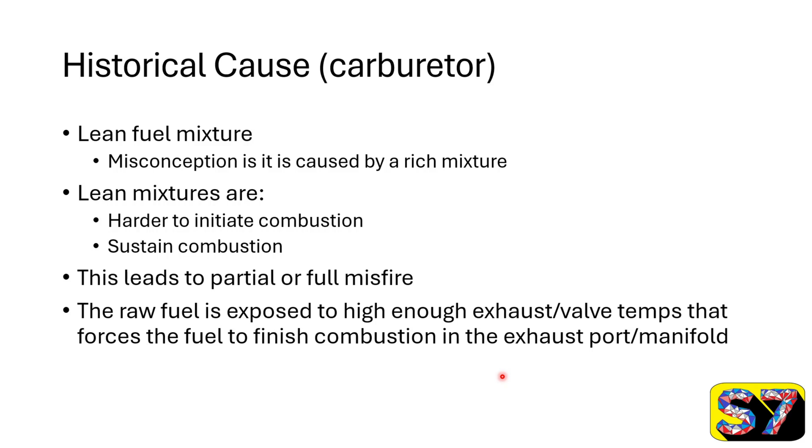So basically, raw fuel never gets combusted inside the cylinder, and it pops on its way out from either the hot exhaust valve, the exhaust runner itself, or somewhere inside the manifold, where the fact that it's lean doesn't matter because it's just overwhelmed by this exceedingly high temperature. It just pops. And that's typically what happens on a carburetor.

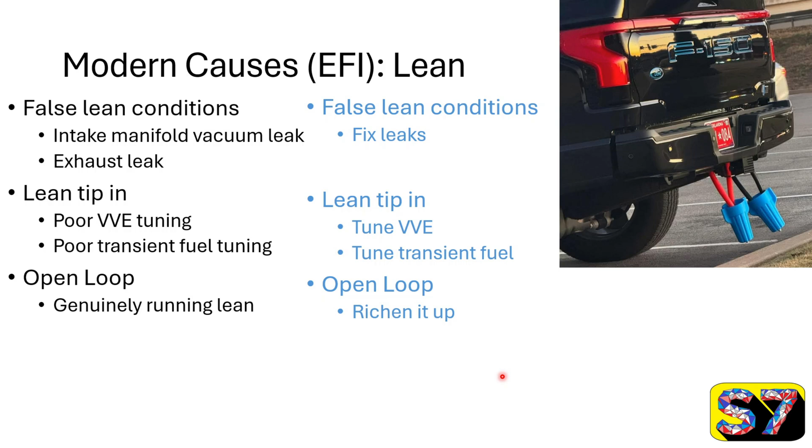It's lean. So for EFI, which applies to us, there are going to be some other issues at play. Yes, lean mixtures can still be a problem, typically more in your open loop scenario, because once you're in closed loop, it's going to want to keep it at that stoichiometric ratio. But vacuum leaks, exhaust leaks, and also on tip-in, transient fueling - if your virtual VE isn't dialed in or your transients aren't dialed in, that can cause it. So obviously the fixes here are to fix your leaks, tune your stuff, and richen it in open loop as needed.

Another issue that can cause popping - and this is just general popping, not necessarily on decel, but to cover all our bases - is fuel injector issues. LSA injectors spray at an angle bespoke to the LSA intake design, but you may have a poor spray pattern due to clogged injectors. Maybe they're propane injectors, maybe your fuel pressure is low, or just your fuel injector is wrong. But you can also have popping caused by other transient issues.

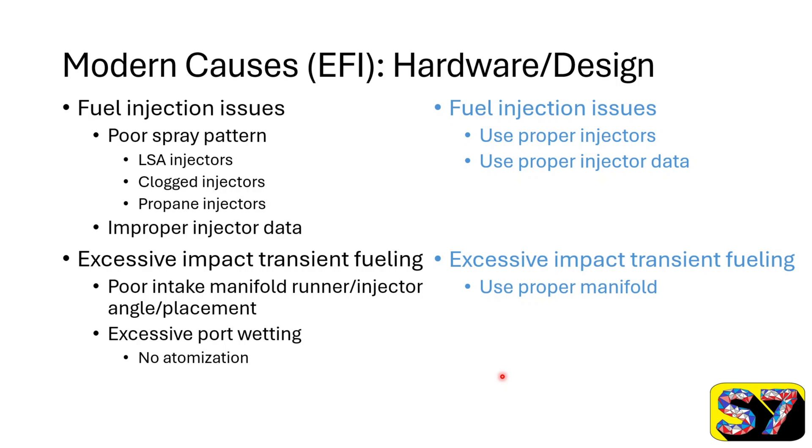Anytime fuel hits the intake manifold runner or the cylinder head intake port and sticks to it, well, liquid fuel doesn't burn very well, if at all. That can drip and dribble into the cylinder where it won't be burned, only to be expelled later and potentially lead to popping. So proper injector data is paramount - that's going to be the foundation for any good running tune. And obviously a proper intake manifold and proper injectors as well.

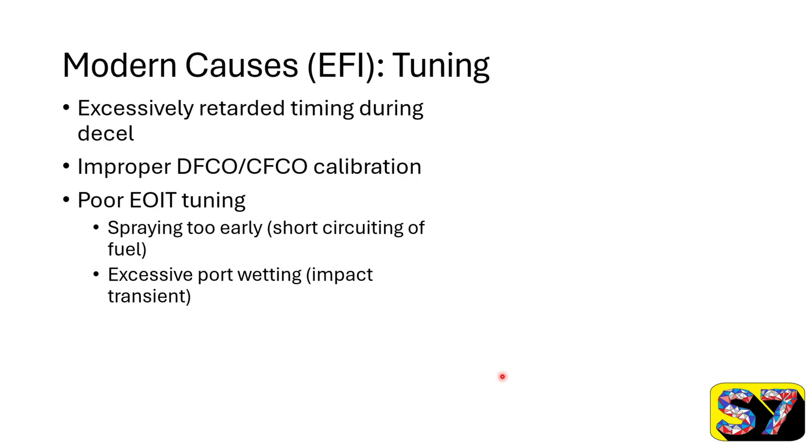All right, now the heart of the matter, what we're going to talk about today. Typically, for fuel injected stuff, this happens when you have excessively retarded ignition timing during deceleration - that can come from deceleration fuel cutoff or clutch fuel cutoff, and also to some extent poor EOIT tuning. That's basically when fuel short circuits: during overlap, fuel is sprayed, it never really gets trapped inside the cylinder, and it just goes right down the exhaust and you get a little pop. So we're going to discuss the ignition timing during decel and how to control that, as well as some DFCO stuff.

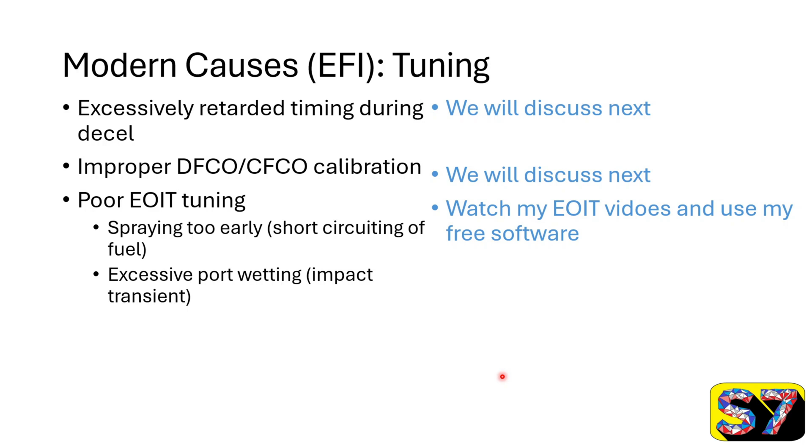End of injection target - hopefully you've been a member of the channel long enough to have seen my videos on that and the free software I've contributed to the community, all of which you can use to tune that stuff.

So why should it be avoided? Now, again, this is subjective, right? Beauty is in the eye of the beholder. I don't like that sound, though the Honda boys seem to like it. It's just not my cup of tea. But it's pretty much an indication that the tune isn't accurate. It's not perfect, right? There are flaws and defects in that tune, and that's going to lead to that popping.

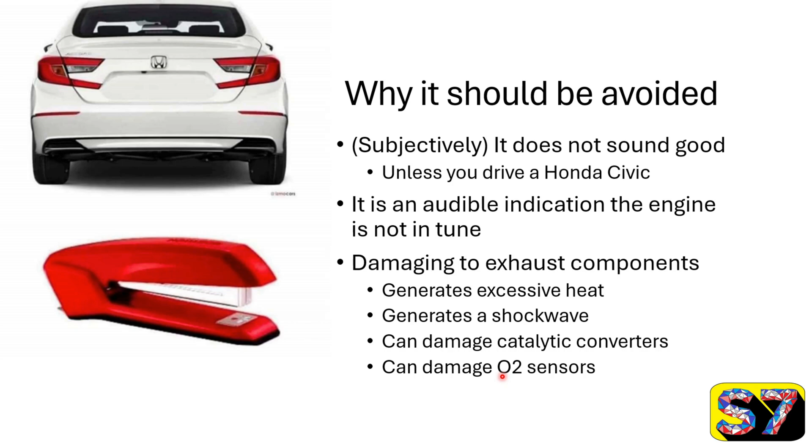If it's excessive, you can start damaging stuff. When you retard the ignition timing, that causes the fuel to burn as it's in the exhaust manifold and on its way out of the valve. You could cook the exhaust valve in extreme situations, and it also puts a lot of heat downstream and generates a shock wave. I'm not saying a few pops here and there will wreck your cats or your O2 sensors, but be cognizant that those shock waves and extra heat will do some wear and tear on those components.

So how do we fix the tune? DFCO cuts the fuel off during deceleration, and as part of that, it also retards the ignition timing. So number one, your best bet here is just to disable DFCO—most tuners are going to do that. It does make tuning a little bit harder as far as collecting logs and looking at the data.

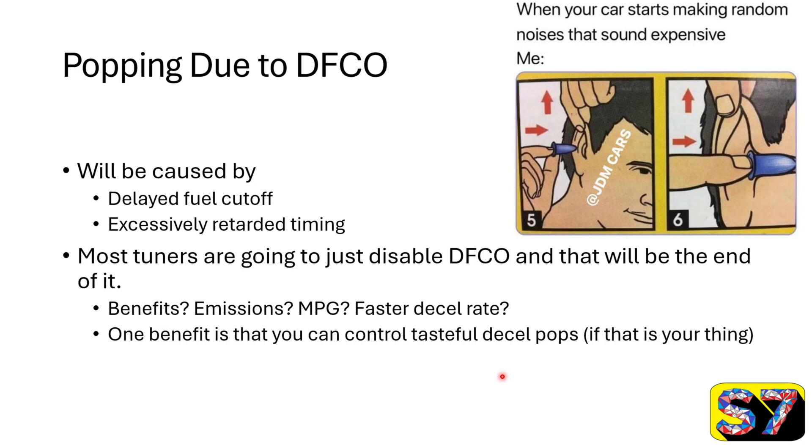You're going to have really rich areas in there due to DFCO, and you can try to filter those out, but maybe when you're all done with tuning, if you want to re-enable DFCO, okay—but at least for the tuning process you probably want to disable it. You can also, if you like some tasteful one, two, or three little micro pops here and there on decel, fine tune DFCO to do that for you.

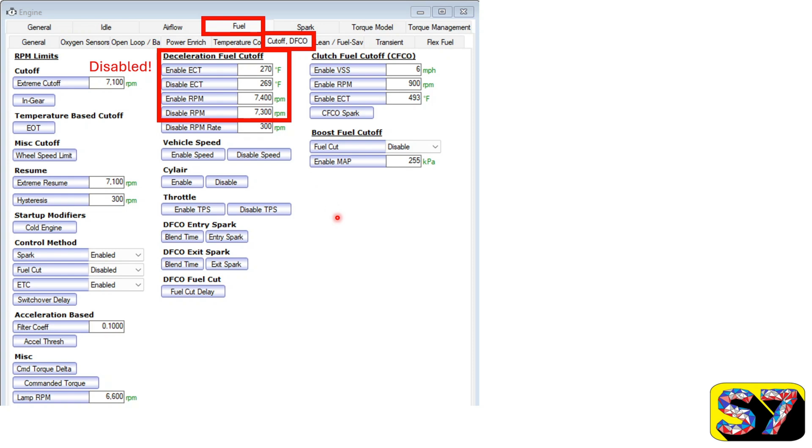So first thing we have here is the blend time. Now this time is not milliseconds, this is in crank pulses. So as we go up the RPM scale, the crank pulses increase—this is just the delay. Then we have the entry spark: we wait this many crank pulses, and once we've done that, we'll retard ignition timing to this value. You can see that we have 10 degrees here.

This is a reasonable and moderate amount of timing. I'd say 5 degrees is probably the lowest you'll want. Once you start getting to 0 and definitely negative degrees, that's where you're going to start hearing pops. But at 10, you shouldn't have any problems.

And then the next one is this fuel cut delay. Now you'll notice these are all zeros, so this is saying as soon as you let off the throttle, cut the fuel immediately, right? So we go instantly to no fuel, and then we wait this many crank pulses. Presumably this is to allow any transient fuel trapped on the port walls or intake runners to either dribble into the cylinder or evaporate—just clear the pipes, so to speak. That's my guess. So as long as this is 0 and this is a positive value, you shouldn't get any pops.

Now, if you want to start adding a few tasteful pops, what should you do? Probably you want to make this delay just a little bit bigger than that one. In other words, we'll cut timing first down to this value, and then cut fuel down to this value. Then you probably want to make this value a little smaller—maybe start at 0 degrees, and as you go down through the RPM range, start reducing this number to eliminate the pops. Again, that's if you want to do tasteful pops, but me, I'd leave it like this: 0 across the board, 10 degrees, and you should have no pops from DFCO.

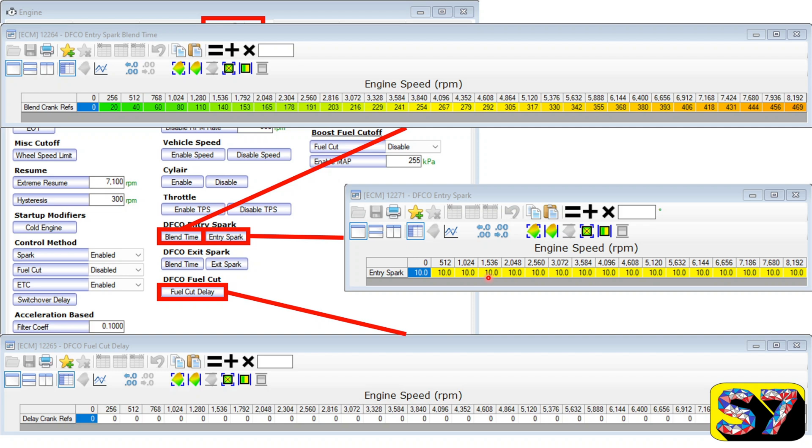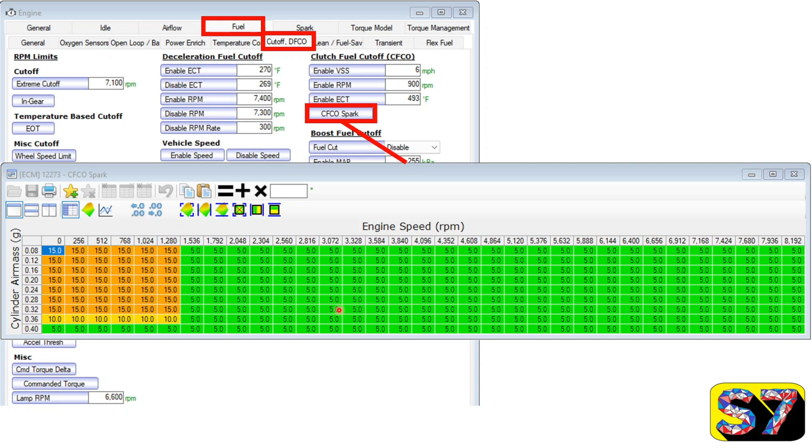The clutch fuel cutoff—this is when you push the clutch, what timing should be used. You can see here the lowest value is 5. We shouldn't really get any pops; this is going to help the RPMs drop. So when you push the clutch in, it'll help you rev match, hopefully a little bit easier. So as long as this isn't negative you should be fine, and I wouldn't go below 5 either.

All right, now the main thing, the popping due to deceleration, air, and spark. So let's look at this timeline of events here. We have a deceleration event. Do we hit DFCO? If so, maybe we could have a pop.

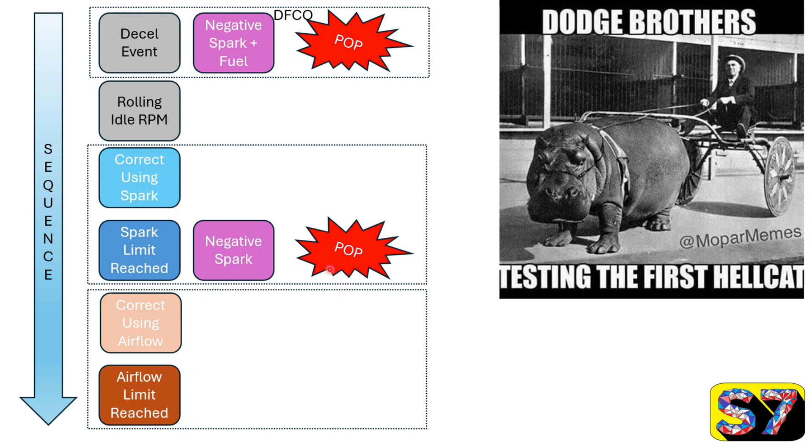But if it's disabled, we can just ignore this. Next, we're going to hit our rolling RPMs, and then we're going to attempt to hit that RPM using air and spark. And so this is where we could have a potential pop. So the first thing you're going to want to check is this rolling idle RPM.

All right, this is going to be our target, and we're going to cover tuning this in a second. And then here's what the spark does. Now, in normal idle mode, meaning you're in park or in gear, foot's on the brake, you're just sitting there, not moving, the ECM should be using spark first as its number one tool in its toolbox to correct idle RPM, and then it should be using air to achieve that RPM.

Using spark is fast, using air is slow. During deceleration, I'm not sure if that algorithm, so to speak, is being used. It may be using air first, or it may be using spark and air at the same time. But either way, we're going to assume that it does use spark first.

So its first thing is, well, what idle decel timing should I target? What should I start at? What's my initial starting point? And that's the idle spark advance for the coast down table. And then it's going to say, well, am I higher or lower than the rolling idle RPM? If it's higher or lower, it'll use overspeed or underspeed.

And then it's going to look at this minimum final spark base table and say, am I trying to go lower than this table will allow? If it is, then it will say, all right, well, then I can't use it. I have to use the value here in the base table. If we go too far negative, we get a pop.

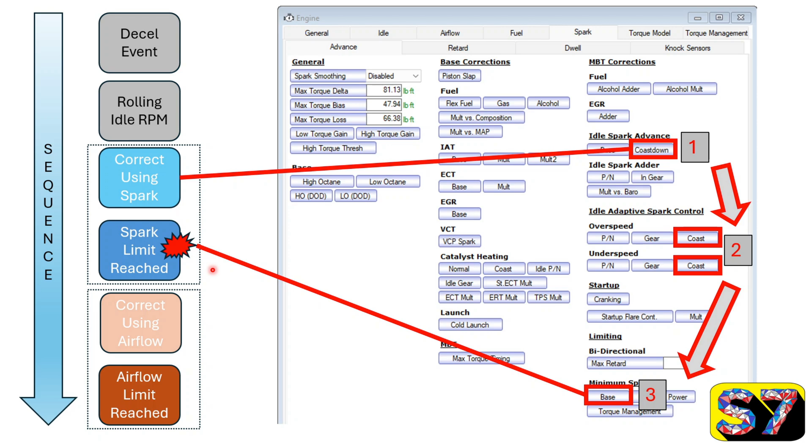Next, we're going to correct with airflow. Now we have this other—I put in this little dummy table in here, and I don't think this is a table, I think this is really an algorithm that takes in a lot of different things into account: virtual torque, max base timing, a few other things, to arrive at what is my idle steady state airflow.

Now, HP Tuners, as far as I know, hasn't really mapped much of anything of what influences this. And not only that, to make matters worse, they did not map this PID in the scanner for all operating systems. Only a handful of ECMs have this mapped. So just because you don't see it doesn't mean it's not there, but it is there.

So this is the starting point, right? Just like we have the coast down spark, this is going to be our steady state idle prediction air for all circumstances, whether we're coast down or we are parked.

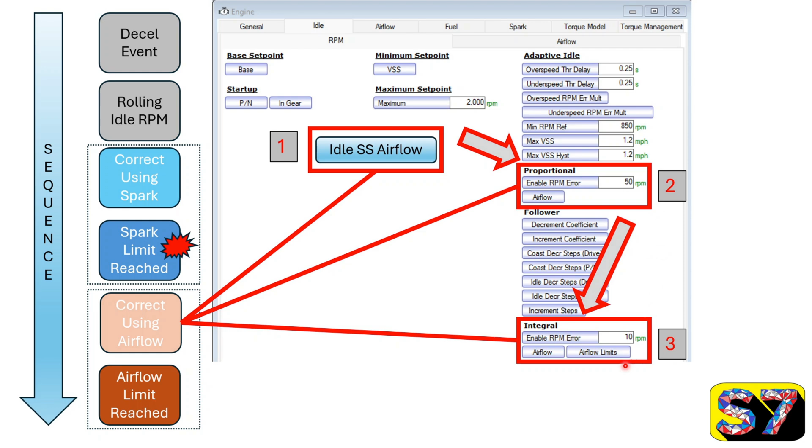Then we invoke or engage the proportional and the integral here, to determine are we higher or lower than we need to be, how do we want to correct it? And then we also have this airflow final minimum, which just like our minimum final spark, is going to say, are you trying to use some air that is less than I have said is the limit?

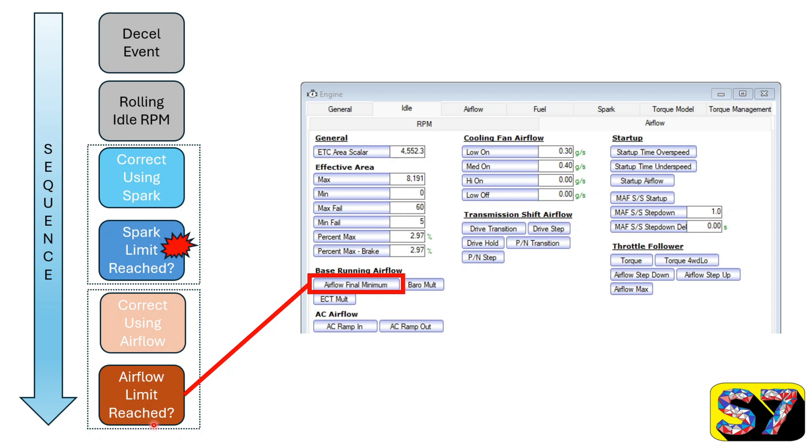Okay, and if we reach this limit, and it's not low enough, then it'll take a lot longer time for the RPMs to drop, especially if our minimum final spark is high and this is high. Maybe it takes forever to idle down. Sometimes you have an engine that wants to drive itself and we can't really stop it.

So if we map this out, this is what it looks like. Our starting values up here. We have our adaptives over here. And then we have these imposed limits, right? The minimum final numbers here.

Now, again, this is why—I know I've said this before, and I'll say it again—a lot of people begin their idle tuning journey by this minimum final airflow. This is the final check and balance of our system, of hey, we're just making sure we're coloring between the lines here. And I don't think that this really should be people's primary idle tuning value. The ECM uses it last. If you fix this and if you know how to influence the steady state, you'll be better off.

And by the way, I did make a few videos a while ago on the idle integral air in which I cover this a little bit more. So you may want to watch those if you haven't.

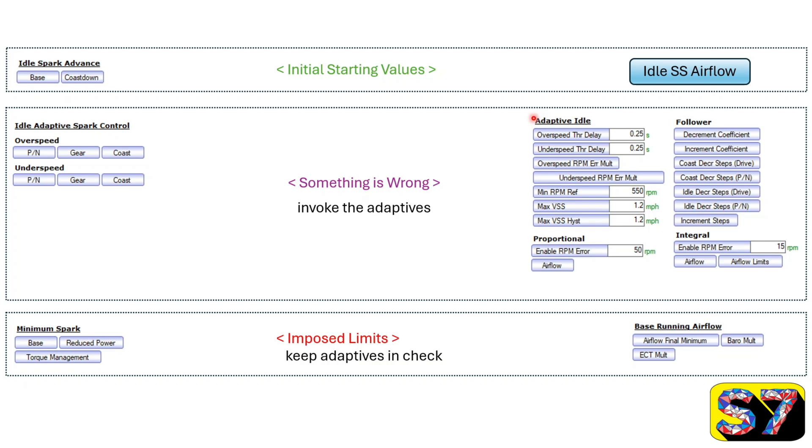So this is how the whole system kind of works together.

Here are three examples of how we could hit our target RPMs. We could use a ton of air and retard the spark a lot, and that's bad - that's going to cause popping. We could have a more balanced approach, which is okay, but this is going to generate a lot of heat in the exhaust, maybe a moderate amount.

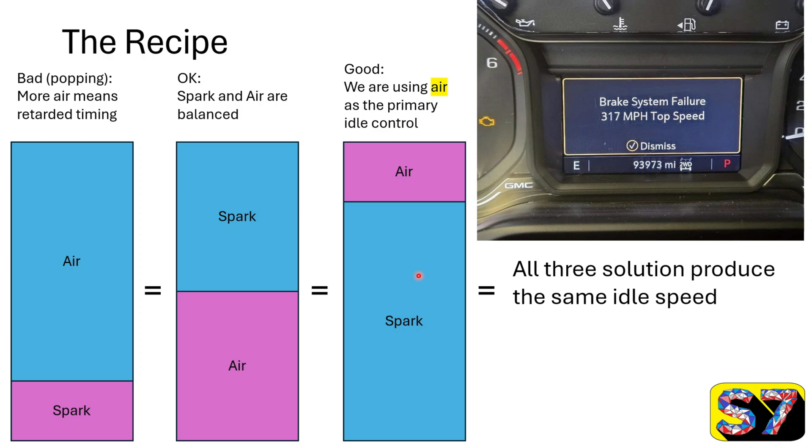And then here we're really using air as our primary idle control. By saying using air, we're saying we're going to cut back as much air as possible so that we can maintain a lot of ignition advance. This is going to keep torque a little bit higher for us, hopefully, to come out of that idle condition. It will prevent popping and it will prevent heat from building up.

Another thing to consider: normal idle tuning, just in park or in gear, that engine is really fighting a ton of frictional losses, just in the rotating mass of the torque converter filled with the fluid, all the shafts inside the transmission, the cam lope wandering all over the place - the frictional losses, and that's hard.

But coast down is kind of the opposite. Instead of the crank driving everything, now we have the momentum of the car. Those rear wheels are really trying to turn the crank and the engine's trying to slow it down, and that's a lot of inertia to overcome. So it's the opposite - here we're trying to not necessarily speed up the RPMs, but maintain. Here we're trying to decrease RPMs and we're fighting a battle of negative friction, I suppose you could say.

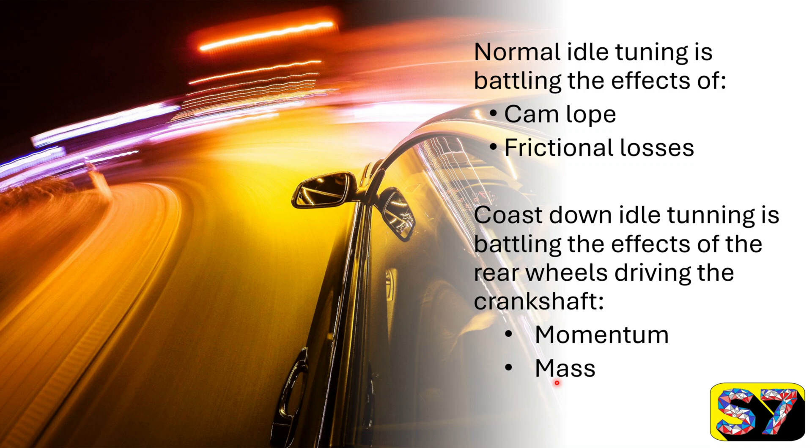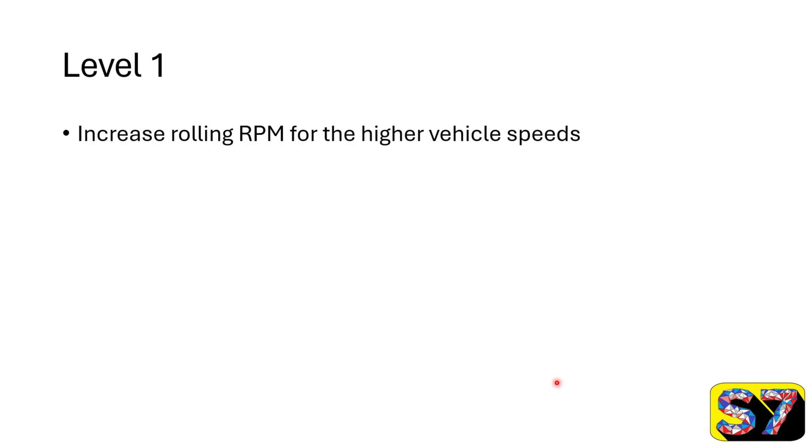So what would be the first step? We'll just call this stage one. The first thing is let's increase the rolling RPM. A lot of times what I see is people will put the RPMs the same all the way across the top here. And if you're rolling at 75 miles per hour and you let off the throttle, 850 RPMs is a pretty unrealistic target. So I would suggest that you need to start a little bit higher, more reasonable, and walk this down.

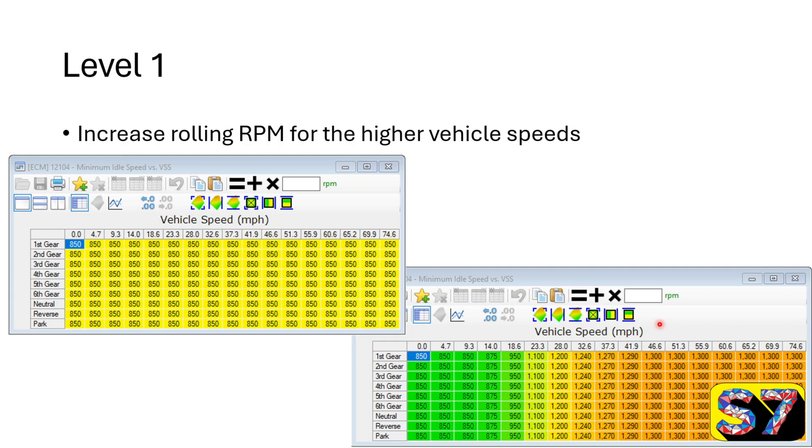Now, this is all for folks who have a moderately aggressive cam. If you have a factory cam, it's probably going to be a lot easier to tune this stuff out, and your idle settings and air settings and spark settings are all going to be vastly different. So I'm not suggesting that you copy any of this, but at least know here are the factors involved, and then you can work on your own recipe to get this under check.

But in this case, we're going to say, hey, 1300 RPMs. And then as speed decreases, you can see once we hit 42 miles an hour, now we start coming down off of that high point, and then we gradually walk it down. What I would not do is have it too high here at the last value and then all of a sudden drop really low - that could lead to some weird idle oscillations or stalling issues. So you want to have a nice gradual smooth transition here.

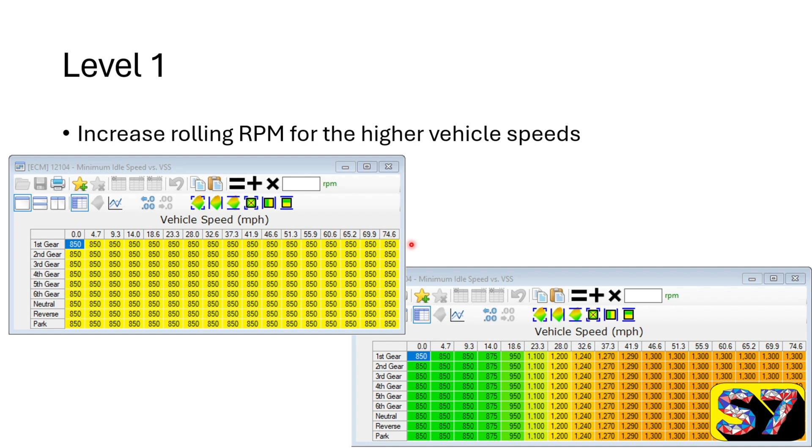Similarly, when we look at the minimum final airflow, we would think that we would want to do the same thing. In my opinion, this is what I see a lot, and this is probably everyone's starting point - if we want to maintain a high idle, say 1300 RPMs, we'll just have a stab in the dark and call this 18 grams per second, and then we'll just gradually walk this down. But this is too high of an airflow - we want to cut the airflow so that spark remains high.

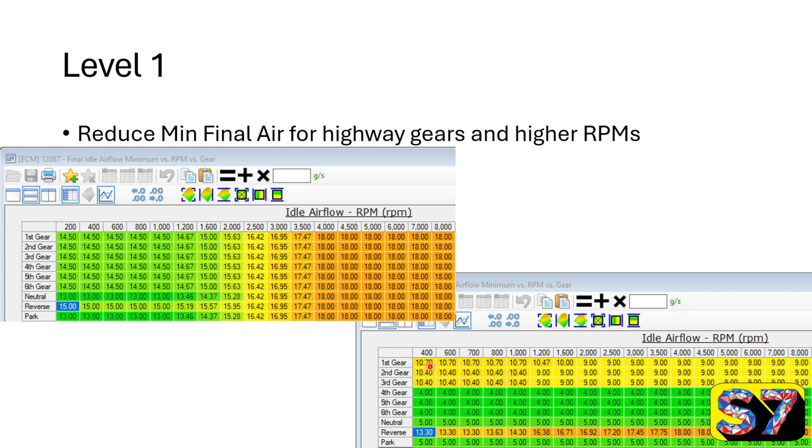So here you can see in my larger highway gears, 4, 5, and 6, I have this set to 4 grams. And then as we get into the lower gears, we bump it up a little bit, and then actually we increase it here at the end to jump things up. Because if you keep it too low here in these lower gears as you slow down to a stop sign, there's a chance that it may stall or bobble or start to oscillate. So we want to walk it back up to where we want to.

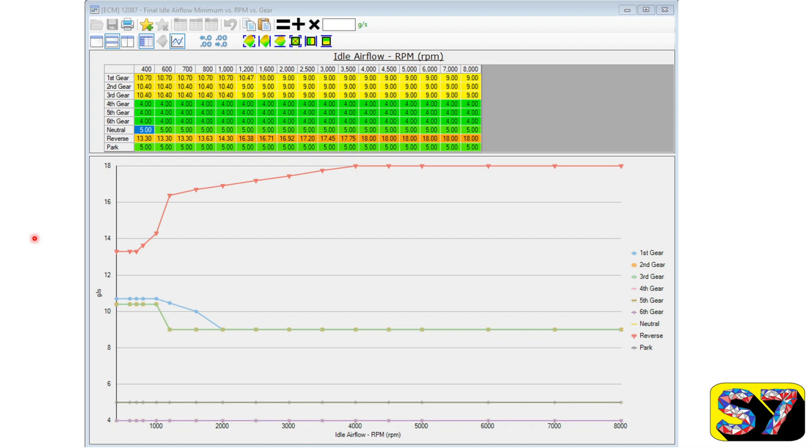So again, just looking at kind of how I have my car set up - here's our highway gear, it's really low and it kind of jumps up, and this is like park and reverse, but either way, you can see the lower gears kind of bridge this gap a little bit more elegantly. So just something to think about. Again, I'm not suggesting that you put this same thing in your car, but at least kind of see how I would tackle it.

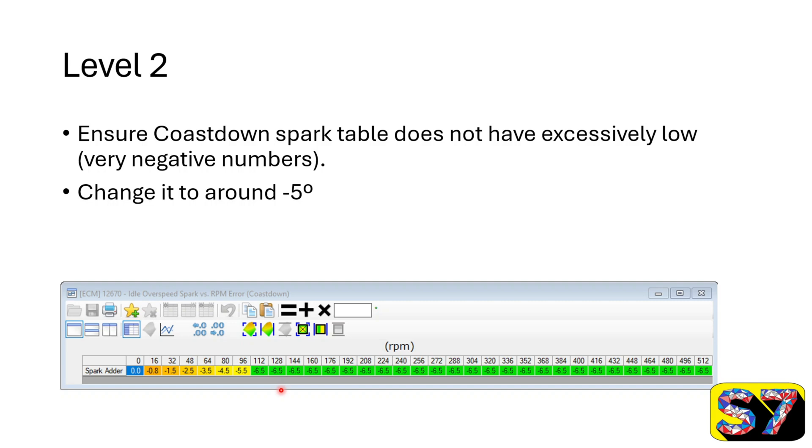The next thing is going to be looking at your minimum final spark table. And by the way, I would say that probably use stock values in here. I'm not suggesting that you go in here with your paintbrush and just start going to town, right? Ideally, you are going to use the stock values for these coast down tables and the same thing for your stock values for the minimum final spark.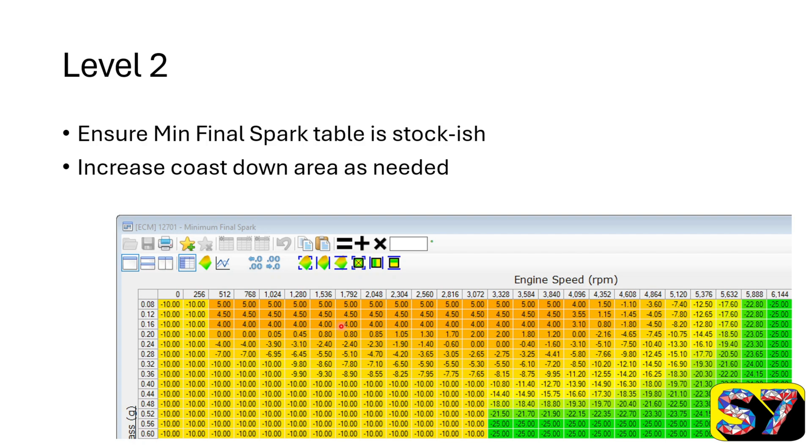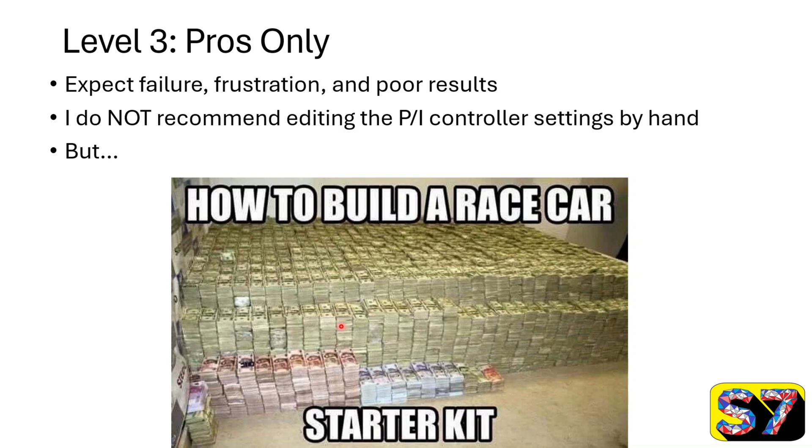All right, now level 3. This is not something that I'm suggesting that you do, but if you reach the end of your rope, you're willing to accept some risks and failure and go on a long learning journey, then you can work on this stuff. And this is dealing with the adaptive proportional and integral, or PI, controller.

Generally speaking, you never want to edit this stuff. So many new people are going to try to tackle their idle problems by plugging in random numbers in here, even if you just multiply by a certain percent. Don't do that. Your best bet is to use stock values, GM approved, that work. This is a highly complex system. I really am advising you not to do this.

But I have done this to some extent and either found a little bit of relief or no real change at all. So the first thing is we have this coast down here. This is saying, and if you watch those other videos that I mentioned before about the idle integral error, you're going to see the integral is far more reactive to errors in the idle RPM than proportional. Proportional is pretty weak in the idle scheme, right? If it is pulling out or adding 1 gram of air, that's a lot for proportional. You may see integral, like you look at these values, this is -10 and that's +13, at least for the coast down. You can see that these values are pretty high.

So the first thing that you can do is if you go in here to this airflow limits and the coast down one here for low, you can make this more negative. So like change this -10 to maybe -15. Now I don't know if your OS has -10 or whatever it has, but I'm just saying an example, you can make it more negative. So this is not the same thing as the minimum final air table. This is just saying how much leeway are we allowing the integral to throw in the ring for its idle correction. So again, this is going to be relative to that idle steady state. So if idle steady state says 20 grams of air, we're saying we'll allow this to pull down negative or add -10, right? So we could pull it from idle steady state from 20 to 10 grams of air.

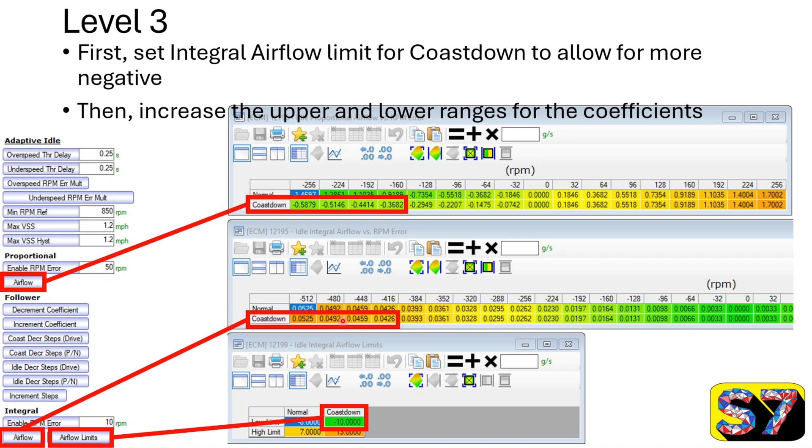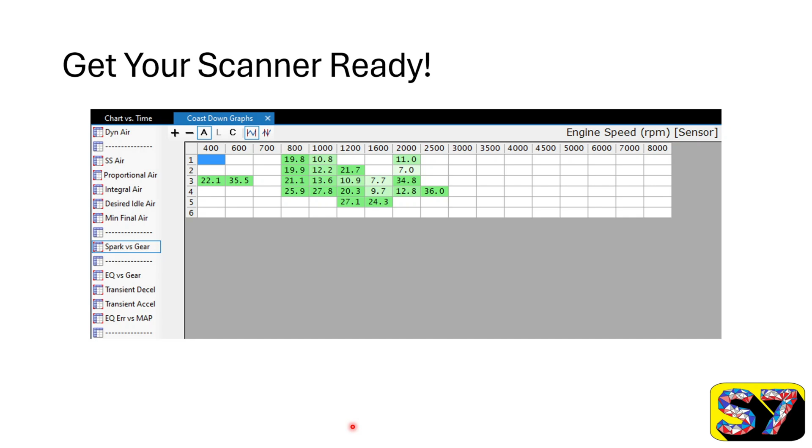Now you can also set up your scanner, and I'll do a live demo of some things to look at. Let's take a look at a couple logs here side by side. On the left side I have a bad log, and on the right side we have a good log.

Our first thing that we have to look at is really spark, so we can look at the evidence here. By the way, here's how I set these up - I'll put this layout in my Google Drive, you can download it, look at the video description. Here we're just looking at Spark Advance, and I don't need to get this exotic, but I did put in kind of my normal transient filter.

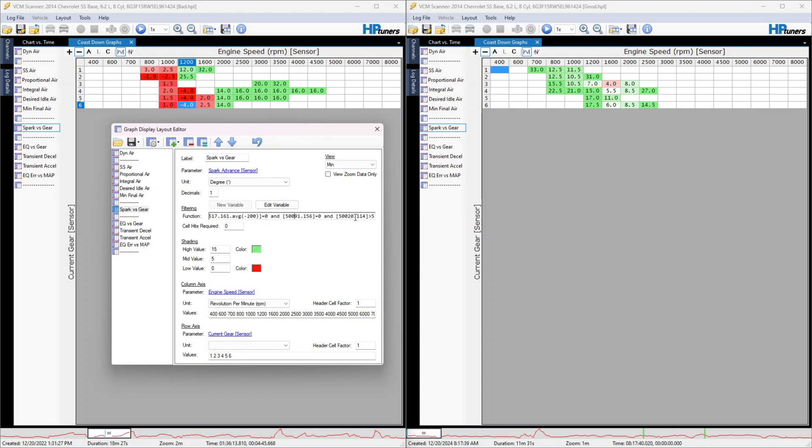If we look in here, we have accelerator position at 0%, and then vehicle speed over 5 miles an hour, just to make sure we are out of the normal idle routine. So we're coast down, and then we just have our RPMs here. This is grabbed from the minimum final spark table, and then we have our transmission gear logged down here, so we can look at where we're at all the way through this.

So you can see that we've got the reds here, that's going to be where our popping is occurring. Compared to over here, which is a vastly different story - our spark stays high and it maintains a lot of advance in here. And then I also have the errors logged in here.

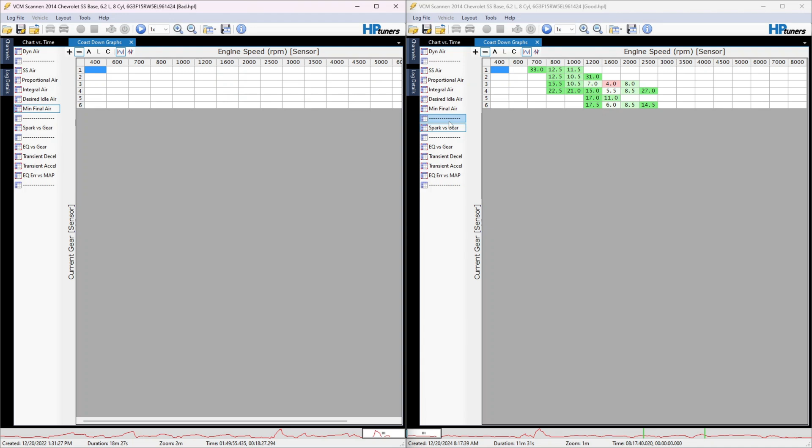Now this log, we don't have all of them in here - well, maybe some of them. But here in this log we have the steady state air, which is going to be the one most likely you don't have. But the real trick, if we look at this idle desired air, which again you probably don't have, understand that this is the final result of - take the steady state air at any given time, add proportional to it, add integral to it, and this is the result.

Your goal is to make sure that this number is always going to be higher than the minimum final air. So this is our basement - we can't go lower than this. So if our actual desired air is lower than our minimum final air, then we've bottomed out on air, and our only option then is to pull out as much spark as we can until we hit the limits there.

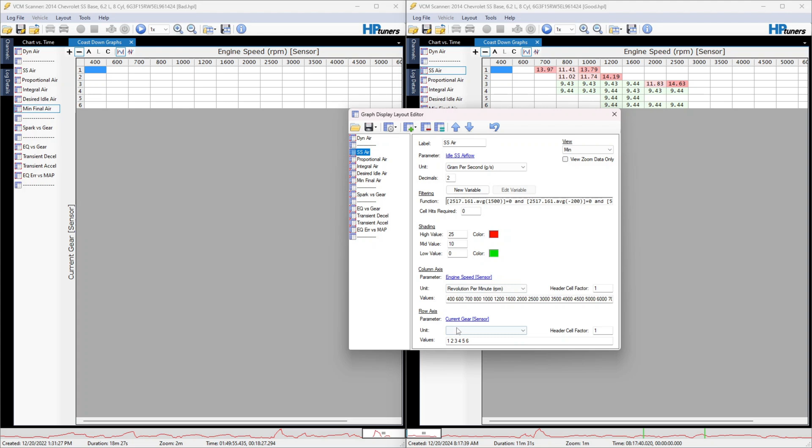But otherwise, all these other tables are set up the same way. If we look here in the graphs layout, we have the same filters in here and all of the same layout for RPMs and everything. This way you can start looking at that minimum final air table as well as the minimum final spark table, and then start addressing the airflow as needed. The only other thing, I did put these on the minimum values here, so that way we're sure to see worst case scenario of where we need to be.

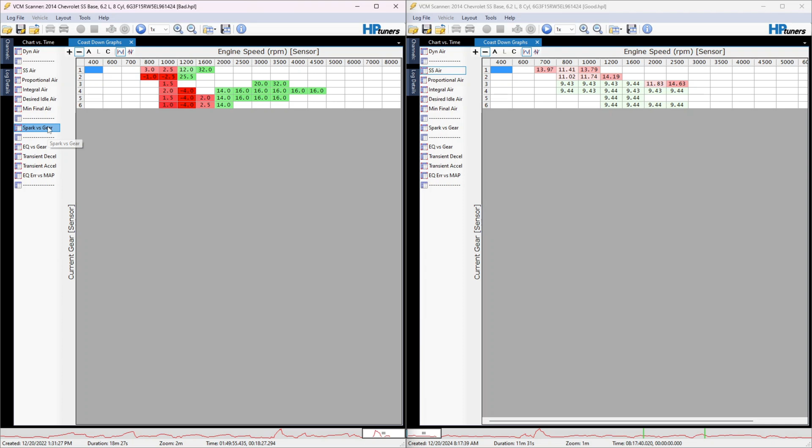All right, so make sure you check the Google Drive if you want to download and reuse this as well.